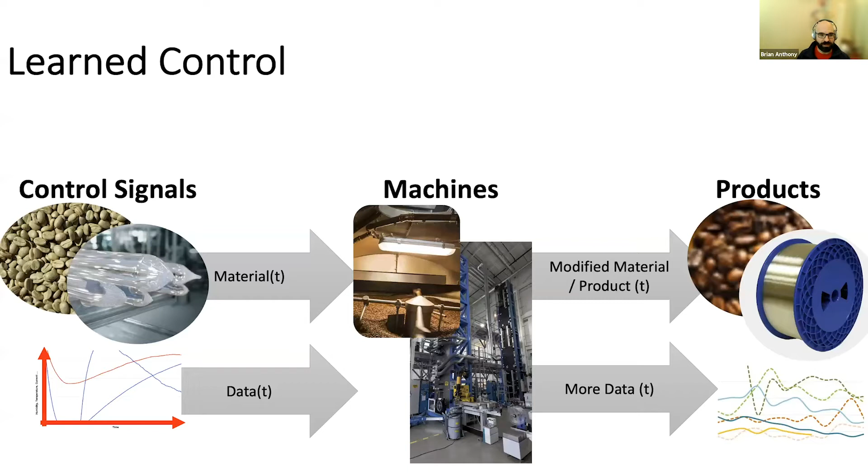The data going in is our control signals. The materials going in are raw materials, and that could be coffee beans or glass rods that go into machines. Those machines could be a draw tower for optical fiber or a coffee roaster. And the product that comes out is coffee or fiber, whether for apparel or optics.

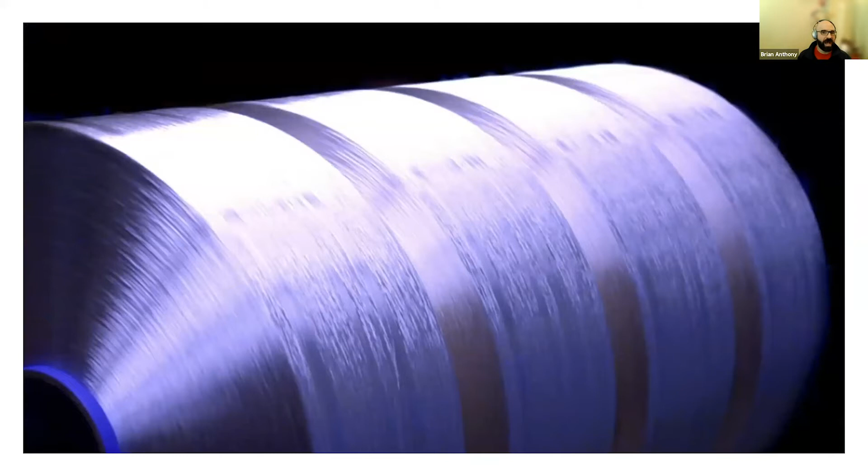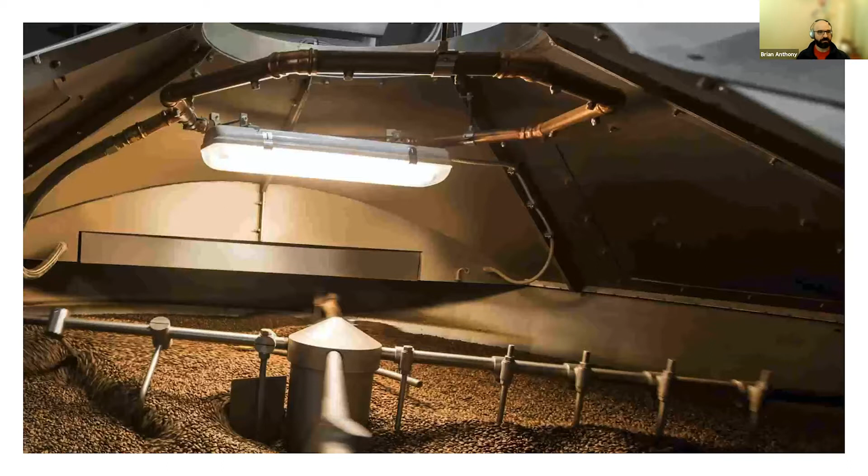So working backwards again from the product: here's coffee. You got to that coffee through some coffee beans. Here's some fiber, and you got to that fiber through extrusion phenomena of a material with certain cross-sectional properties. Those materials ran through machines—this one a coffee roasting machine, this one a fiber extrusion machine.

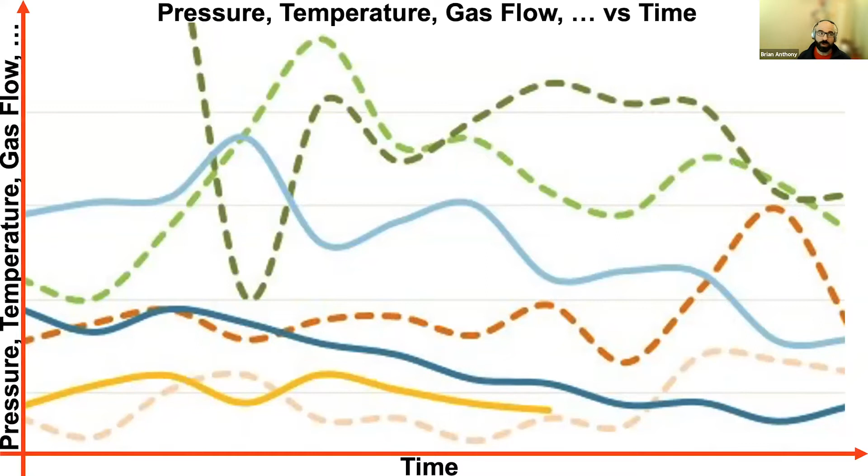Those machines are complex and controlled by signals over time—pressures or temperatures, gas flows or velocities, and forces. So that's a little of the context.

Now, when we're manufacturing, we're trying to make a product—trying to design and execute quality production of something that will be in the customer's hands. So you have some process making your fiber or coffee, and a controller that's measuring an aspect of it, like the diameter of the fiber or the temperature of the coffee, and wants to control it.

In the case of the fiber, I want to control the temperature used to melt the preform, I want to control the tension of the fiber, and I want to control the diameter of the thing I'm making.

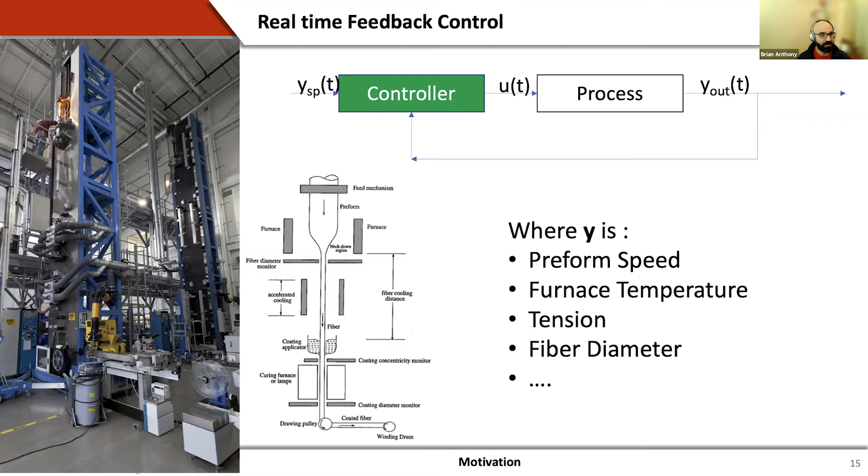By and large, if you survey most controllers and programmable logic controllers, the way machines are controlled in practice now, they use PID—proportional integral derivative—controllers that work well and are mathematically rigorous and understandable for linear time-invariant systems.

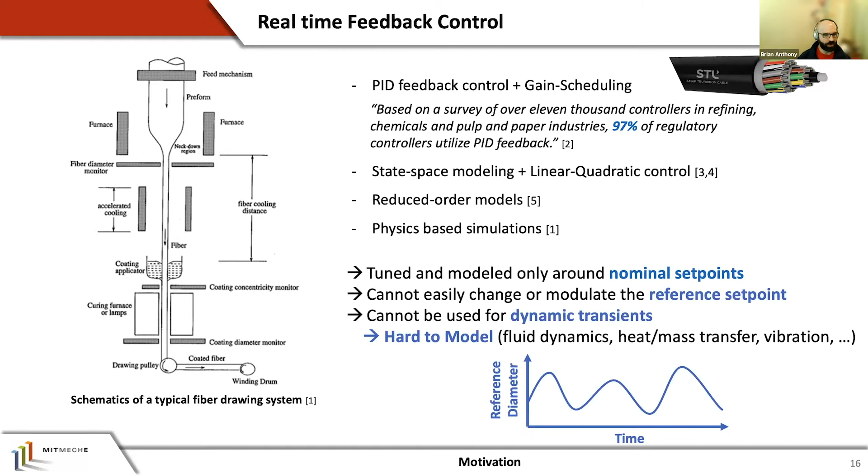There are innovations that take us beyond linear time-invariant systems, incorporating models of the process you may want to control. But something like a PID controller, for a system such as coffee roasting, fiber draw, or 3D printing, works less well where you want your process to be far more dynamic.

And you want your process to be dynamic if your product is dynamic—changing over time in its optical or dimensional properties. Controllers like PID work really well when modeled and tuned around a nominal set point, but it's hard to change them for new set points or operating conditions, and hard to completely capture the nonlinear dynamics for systems involving fluid dynamics, heat, and mass transfer.

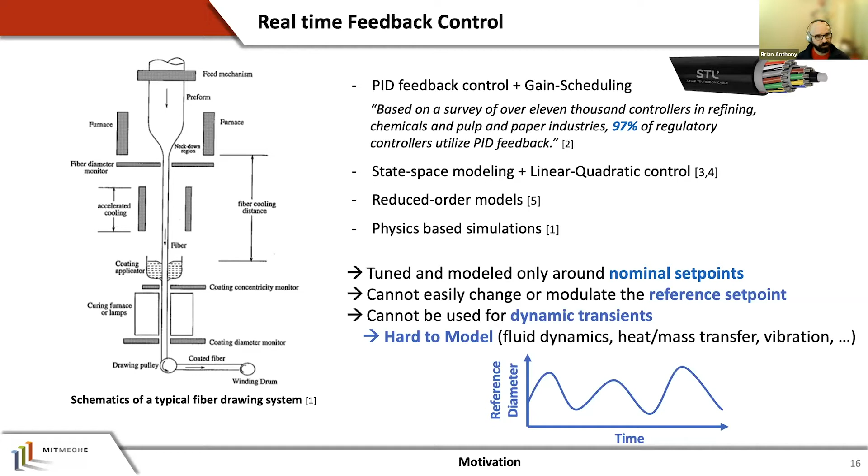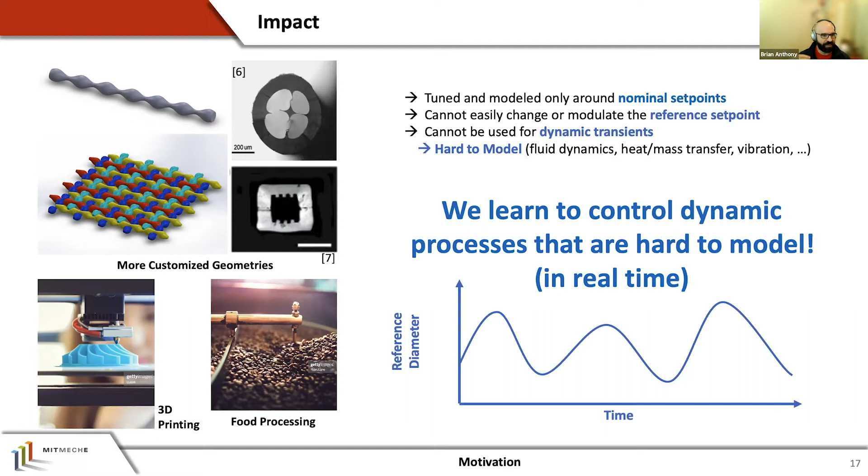So the question that we've been tackling with many, about 5 now, industry partners, is: let's figure out how we can integrate machine learning into real-time control, where we want to have the performance that a conventional controller would give, proportional integral derivative control, making sure your error is small and you apply control effort when your error goes large, to maintain within spec. But how do we take that process of operating around a set point to learn about the process we're controlling, to learn about the material flowing through, not learning from first principles, but informed by first principles. So let's look at how we improve controls where we're looking at things that are hard to model from first principles, but learn a lot more while we're doing the thing we want to be doing, just producing a high quality product.

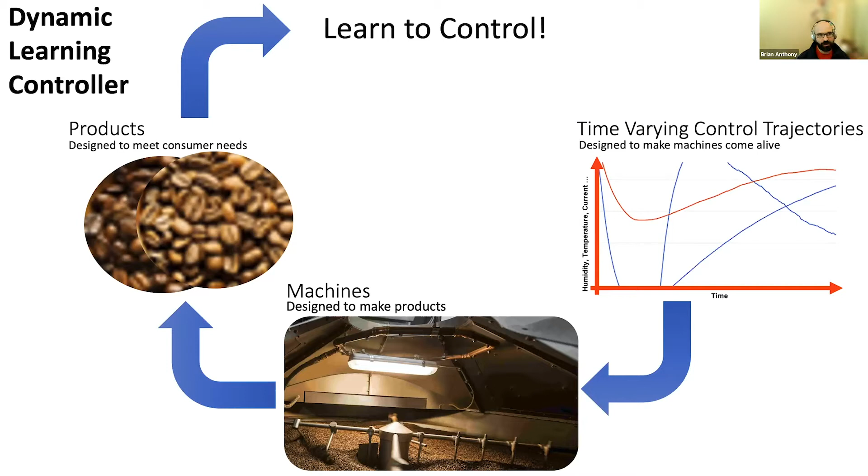So the framework, if you think about this, is in this era of big data, you're getting lots of data in a manufacturing context all the time when you're doing control. We have control trajectory signals that we're using to control the extrusion rate, the winding rate, the heating rate of fiber, or the pressure and temperature of coffee beans being roasted. It goes into the machine, interacts with the product. And when we learn to control, we want to learn the physics, learn to optimize, and learn to make new variants of the product we're making.

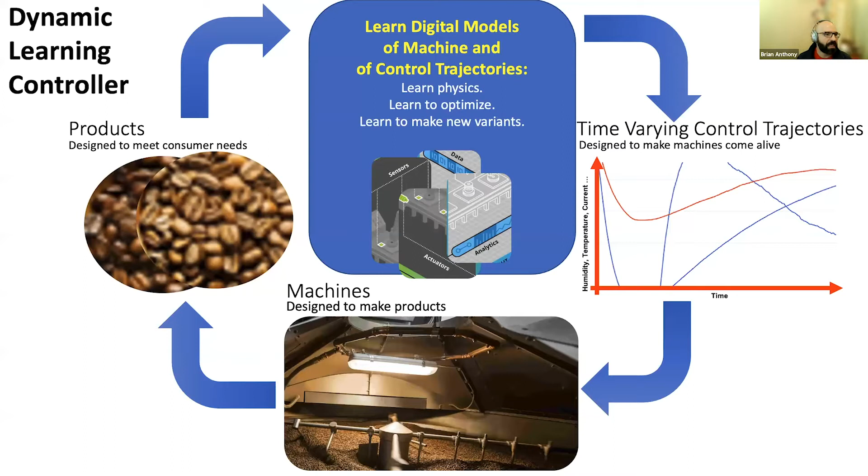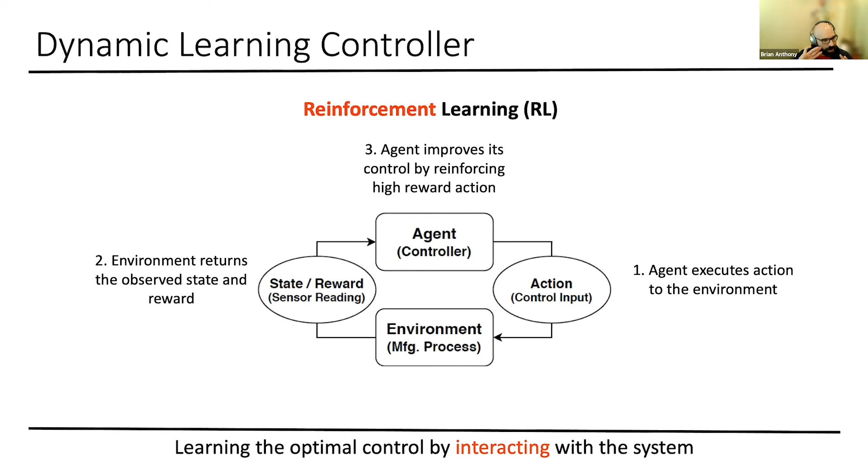In the language of deep reinforcement learning, this figure looks a bit like this: we have some type of action, something interacting with the world, our controller. We have some environment we're interacting with, in this case the manufacturing process. We have some type of reward, the control signal we're trying to minimize. And there's potentially the ability to add this agent, a higher level layer of logic that allows us to improve over time, not just say we have fixed gains, our fixed way of operating, but let's learn online, not offline, not collecting data and sitting in front of your computer connected to Amazon Cloud doing it at your leisure, but doing real-time learning while you're real-time controlling.

So if we break that figure down into this architecture of deep reinforcement learning, we have all these little pieces you may have heard about in the machine learning literature. We have some actor or agent, we have the machine. There are measurements being made, the diameter, how fast the fiber is being pulled, how much heat is put in. We measure the diameter, and we want to minimize the error between the diameter being produced and the diameter we want. And then there's all this other stuff wrapped around it, which is the machine learning aspect. Let's go piece by piece.

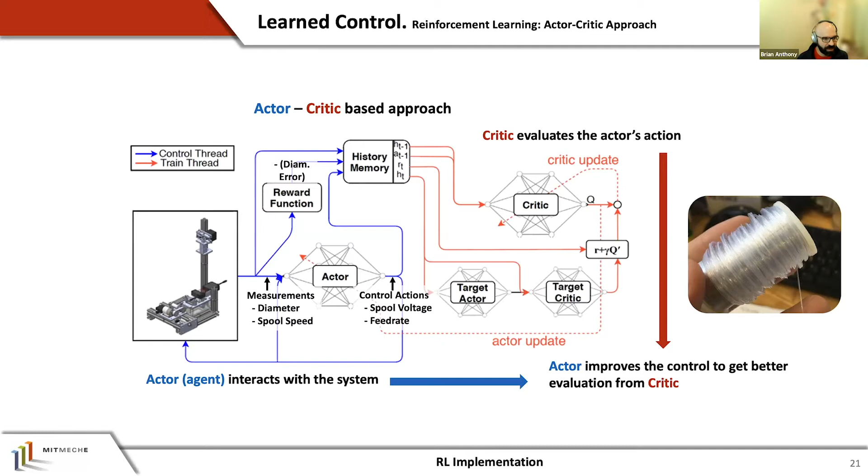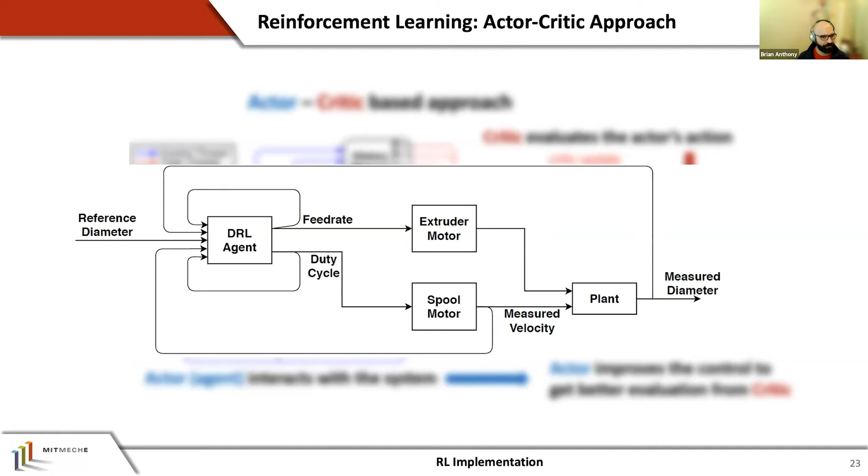This aspect of the reinforcement learning flow diagram, the blue box, if we drill into that, is really not a lot more than a conventional controller. We have some reference we want to control for, the diameter. That goes into a machine, into a controller deciding how to apply control effort to our machine, in this case the motors for extrusion, the motor for spooling, and we measure something coming out of the machine, in this case the fiber. We put it back around and we have this controller. So this deep reinforcement learning agent, in this little aspect, looks a lot like a conventional controller. That's what allows us to do real-time control for that machine.

And then these other pieces are wrapped around it, the machine learning aspect, the ability to learn and observe over time. So we have that controller controlling the machine, but we're storing a history of all the data we've been receiving, both measurements on the machine and measurements on the materials in and out. We have some additional reward, an objective function, and we're still trying to minimize the error between what we want and what we get. So that is roughly what the reward functions will look like.

And then we have some additional logic, which can look like a neural net with multiple layers, multiple nodes, which is really just a complex way of fitting data to models, learning the models that explain the data, but then helping to inform and guide how our PID gains, or the gains of a slightly evolved controller, may need to be modified to get even better performance.

So, to try to demystify this a little bit, in manufacturing and design we've been doing aspects of machine learning for a long time. Feedback control is machine learning. Statistical process control is machine learning. But now with the advent of additional compute and additional sensors, efficient compute, we can add a lot more compute to happen in real time and learn more about the system as we're controlling it.

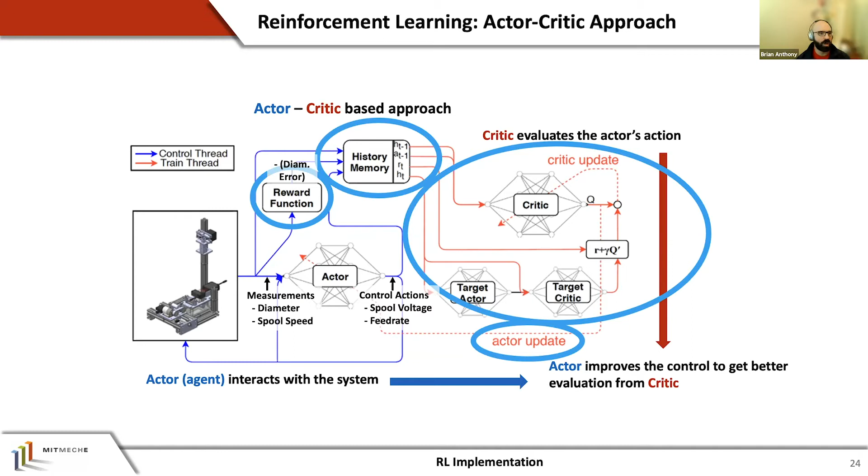A paper led by Sangwoon Kim recently came out that talks about this very notion in the application of controlling fiber. We started with a lab-based system to make a polymer fiber, and we're now collaborating with an optical fiber manufacturer to deploy our learnings onto real draw towers.

We're in the process now of applying these same learnings to other processes with additional industry partners, in particular looking at coffee roasting.

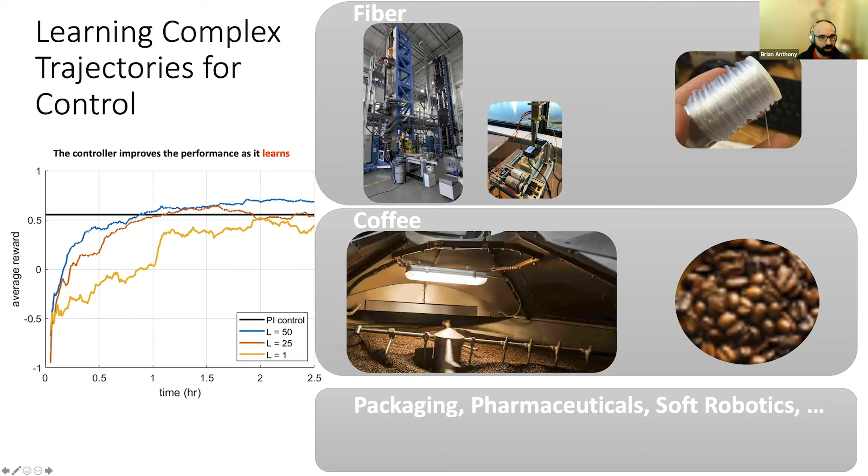Now, I didn't say too much about the fiber draw process, and I had to explain a little bit more to share why this figure is so interesting. If you think about optical fiber draw or extrusion in general, it's a mass flow problem. You're pulling mass out of a heater that's melted the material, and you're pushing mass in. There's some complex physics happening in terms of the heat and mass transfer, and the neck down of the nozzle that goes from a large area to a smaller area to produce the diameter of the fiber that you want.

One of the exciting things about this plot, if you look at it for a moment, is: if I have a fiber that's being extruded and I want to make it go smaller, I just pull faster, or I could push slower. One of the intuition-reinforcing things we see that this controller, that the system allowed us to do, is to simultaneously figure out this sort of simultaneous pushing and pulling that appropriately rapidly deals with the transients if we're trying to change the diameter of a fiber over time. We'll sometimes pull faster and sometimes push slower to accomplish the same target change in the diameter of the fiber we're trying to produce.

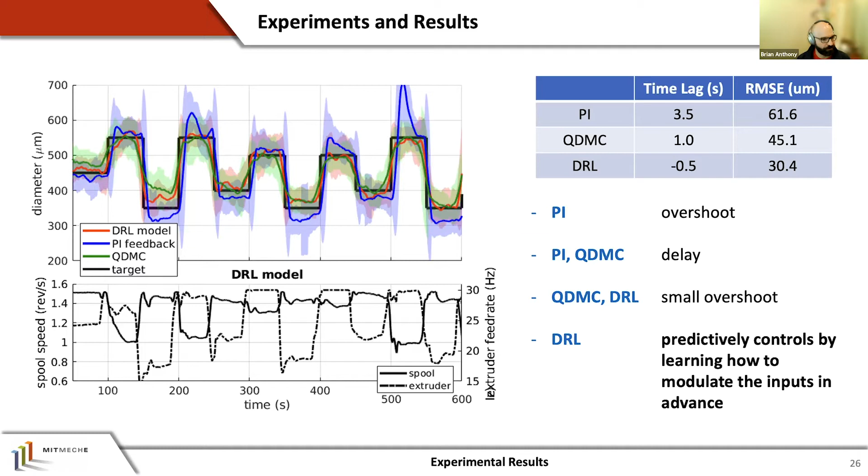So this strategy is something we're now very excited by and are repeating in a number of different processes. It's a strategy that doesn't require a completely developed first principles model. It can be seeded by first principles, but it learns over time to deal with some of the difficult and hard-to-model physics embedded in the process we're controlling. It's using this notion of deep reinforcement learning, but in real time, to really, over time, make your system better, higher quality, and deal with transients in a better way.

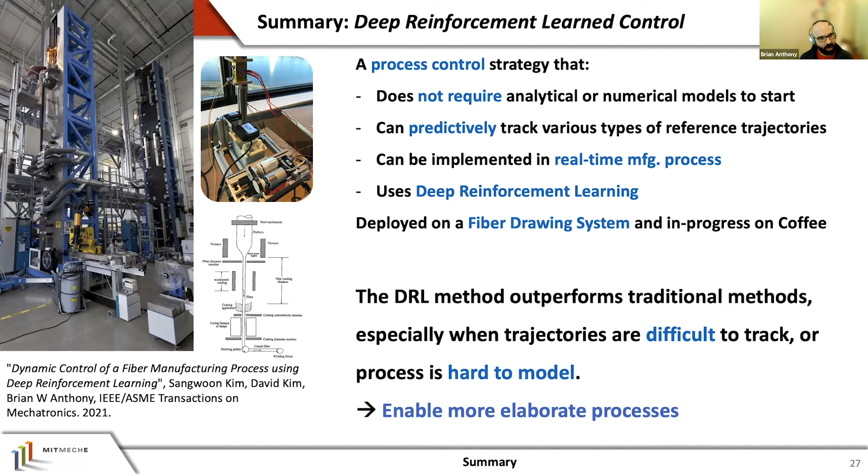Now, one of the things we've really interestingly run into, as you can imagine, is that there's a lot of installed controllers in the world, whether for optical fibers, coffee, painting, or assembly. How do you approach this wonderful new opportunity of machine learning in real time on existing systems? Where do you even get started? I want to share a little bit about that, and would love to talk with many of you about how to amplify that in your facility or in your research.

If you think about a system in some sense, it's a bunch of blocks. We're taught to draw it as blocks in a block diagram that are connected with arrows and feedback loops.

Here's a rough drawing of the control loop for a fiber draw system, where we have this black box, which includes the furnace and how the material travels, the capstan that's wrapping it up. And then there's some controllers, these red boxes — one controlling the tension of the fiber, another controlling the feed rate of the material going in, and another controlling the feed rate of the material coming out.

So the way we approach decomposing an existing system is that typically we'll have data at the inputs and outputs of all of these boxes. So we know what the controller is, what the PLC is doing. It may be a proportional integral derivative controller, and we'll know what it's doing, but we can collect data at the input and output and look at a regression model to confirm that it really is a P, a PID, or a PI controller.

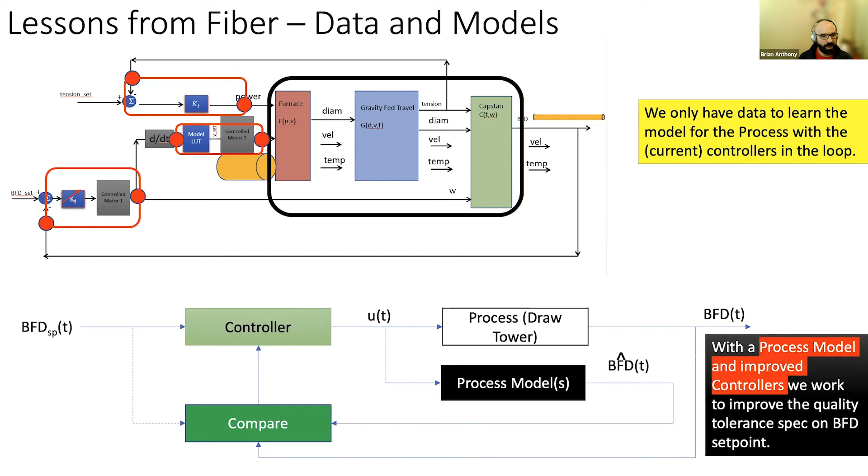Our approach to this is very much how do we go from data to deploying. We'll start with some intuition for the model of the process we're trying to control. That targets the type of data and the type of machine learning structures you may want to use to learn a little bit about it. But it's not just the blind application of a blind regression model.

Taking some of the physics — machines we know oscillate in a particular way, heat transfer happens in a particular way — so informing our machine learning with an intuition for the physics, and doing designed experiments to collect data as we normally would. In the manufacturing environment, if you have a lot of bad data, you're probably doing something wrong. So one of the other interesting challenges about machine learning in manufacturing is you have lots of really good examples and fewer bad examples. Having some physical intuition for what's going on dramatically helps accelerate your learning and application of innovations in the controller to improve quality.

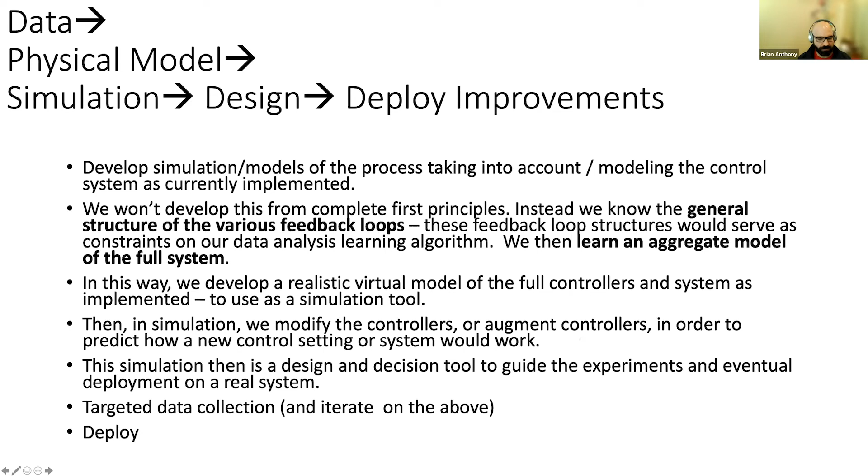So the generalized approach we're taking here is starting with existing controllers, collecting data before and after the process, collecting data before and after the controllers, using machine learning techniques to develop a process model. And with that process model, we're able to improve the controllers for better set point tracking and better recovery from transients.

So let me transition now for a moment. I want to tell you a few quick stories. That was all about real-time control.

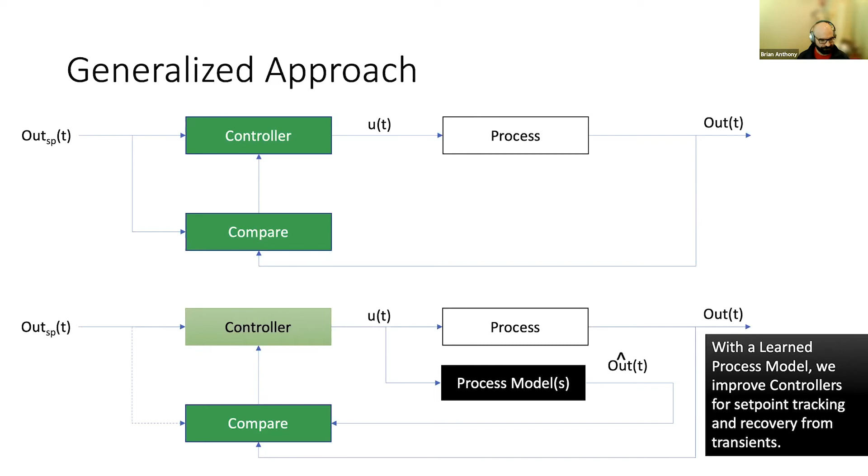Let's take a step back and say there's a lot of interest in industrial Internet of Things, or how we can collect data across our entire enterprise and use it to learn something — learn when machines are going to be down, or understand the efficiencies of different arrangements of people and resources.

So many individual companies are certainly excited by AI, machine learning, Industry 4.0, the industrial Internet of Things. An opportunity that I think maybe goes beyond that is breaking down the four walls of the factory, making our factory smarter, certainly by collecting data and figuring out how we can extract actionable information from that data inside our four walls. But what if we also...

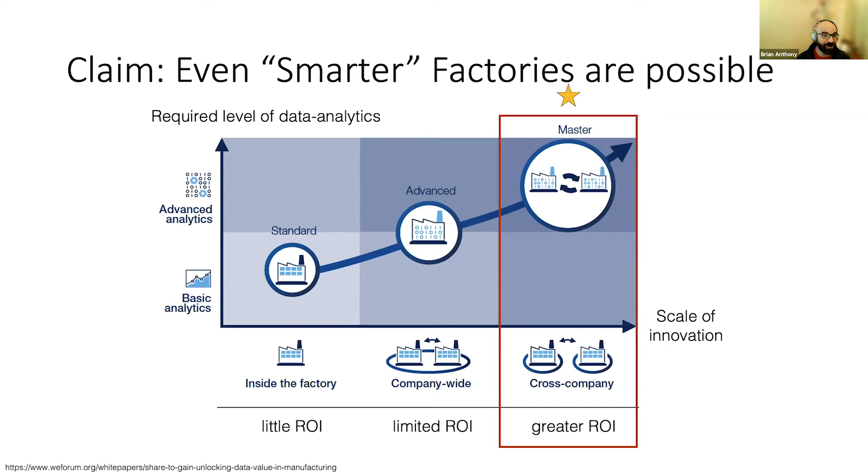Maybe somewhat analogous to learning population data from people for healthcare and wellness applications, what if we share our data, maybe across companies, across collaborators — can we get even more valuable information? And can we develop the business model around which allows us to share data in a safe way? So there's an evolving understanding, a belief that data sharing — beyond just collecting data and using it in your four walls, but allowing us to share data along the value chain, along the supply chain, both with your customers and potentially with your competitors — there's dramatic financial opportunity.

But you should be, my suspicion, a little suspect by that. I'm not going to share my data. Why would I want to share my data? It's my data, it's my proprietary data, it's my secret sauce.

Fair enough, right? But the argument is, and I believe this in many scenarios, if there's some willingness to share, there's additional value, additional benefit. And if we can lock down the pieces of information that are your secret sauce, and allow things that aren't your secret sauce, that are maybe more about the maintenance of a machine, or a general process used by many manufacturers, to be shared.

So how do we connect, and why do we want to connect our data with others?

David Kim is a doctoral student in mechanical engineering who is really looking at this area of manufacturing and data sharing, privacy, and learning. And the concept, if I didn't make it clear, is highlighted here.

It's quite simple. If I'm one manufacturer, I may have a little bit of data about a machine or a particular mode of failure, and I would like to use all of my labeled data, good and bad, to figure out what is a decision boundary, a classifier that allows me, with a new observation, to know whether something is good or bad.

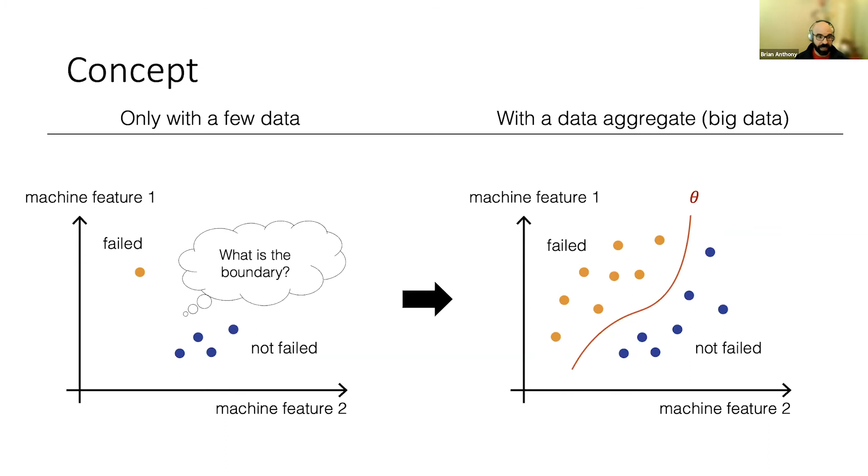Quite typically, if I'm a good manufacturer, I'm going to have lots of really good examples and very few failed examples. So it's going to take me a long time to figure out on my own where this decision boundary may be. But maybe I can aggregate data, maybe collect a lot of my own data, or collect data across multiple sites, or for even bigger data, collect it in conjunction with my collaborators and partners.

So if we do that, if we have multiple data sources all coming in, that gives us more data. It gives us a better ability to make this boundary. Now the question is, how do I do this in a shared way, in a secure way?

This is an area where we'd really like to collaborate with you, both on the technology for machine learning, but also the business models for how we may be willingly sharing data.

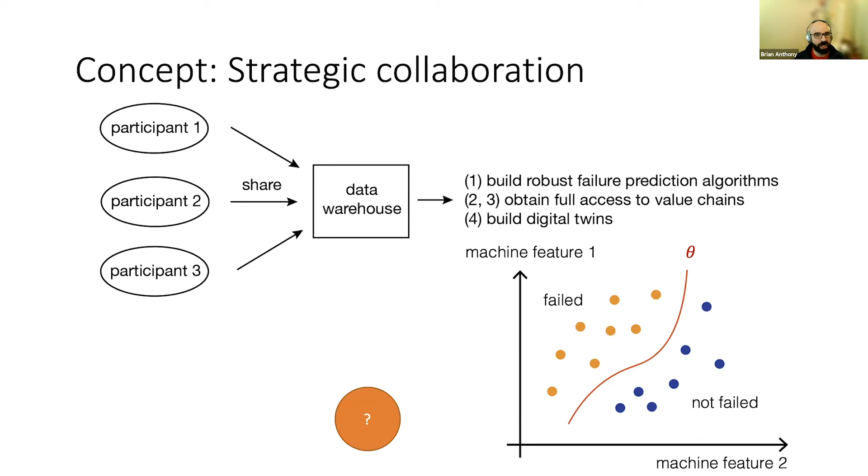The way that we technologically enable this is through some encryption techniques called homomorphic encryption, where we can make sure that your data, when it's shared, is always protected. But not just protected—when we do the machine learning, it's happening in the encrypted space. So we don't decrypt the data to do our learning; we actually use encrypted data and process on the encrypted data.

The techniques that David is developing allow us to implement what you'd think of as classic or more modern machine learning techniques, whether classification or regression using support vector machines or decision trees, but doing that on data that's been encrypted.

We believe that this framework is going to allow us to really explore the idea of sharing data across multiple factories, across multiple companies, in a way that is both technologically secure and has some really interesting business models associated with it. Well, if a data breach were to happen, maybe there is an insurance model that an insurance provider can provide to backstop that, but with a known and quantifiable risk portfolio because of the security key that you're able to put on the homomorphic encryption, for example.

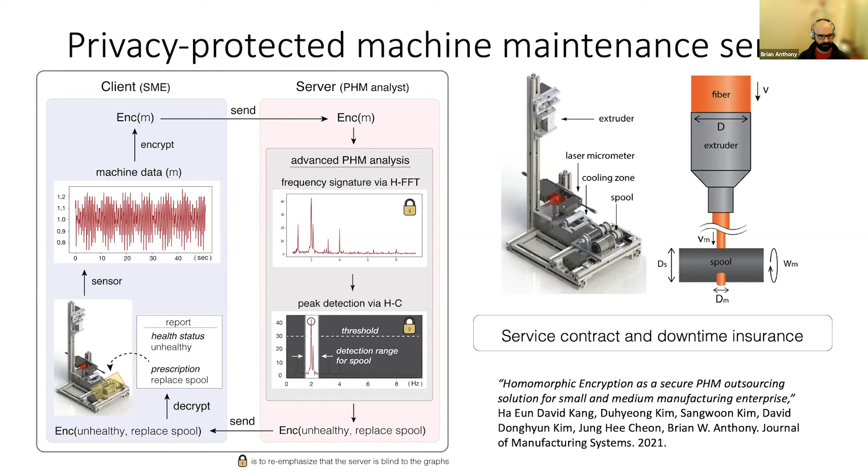Okay, so the last story that I want to tell you—and then I'll try to put this together into some opportunities for collaboration and some lessons learned.

Video-based machine control. If you go into a factory, it's not uncommon to find a camera taking images of something coming down the conveyor belt—a circuit board, a car door, or the height of fill of a bottle—and making decisions about the way that part or product looks. Is the fill high enough? Is the cap on straight? Is the circuit board or its components oriented in the correct way?

And then when the complete jam happens, if you had to unjam your office printer, you know that can take an hour. If you're unjamming a factory scale printer, it's hundreds of thousands of dollars and lots of hours.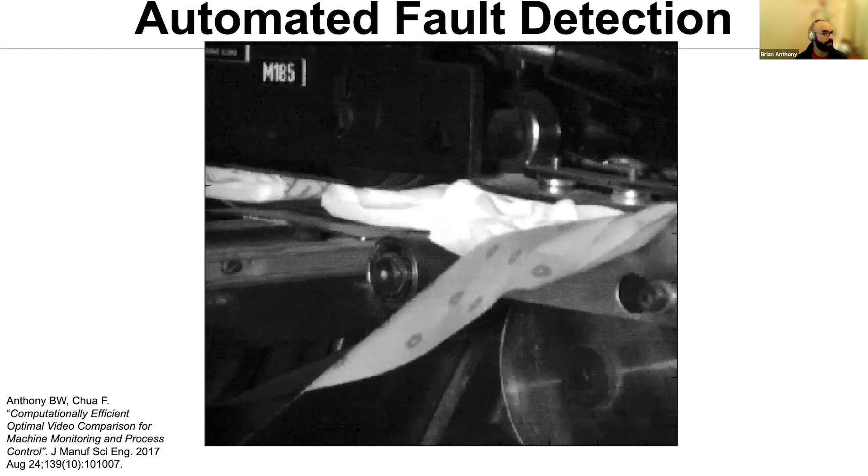So what you'd like to do is observe how this thing is flowing, how this thing looks, the material looks over time. In this case, happens to be a diaper being packaged, and to use information extracted from the video to stop the machine, adjust the flow rate of the machine, or do something.

Now, this is very applicable in scenarios where you don't have a good sensor that would be able to detect vibration or other signatures. This is something that is an amorphous, flexible, flowing piece of fabric or paper.

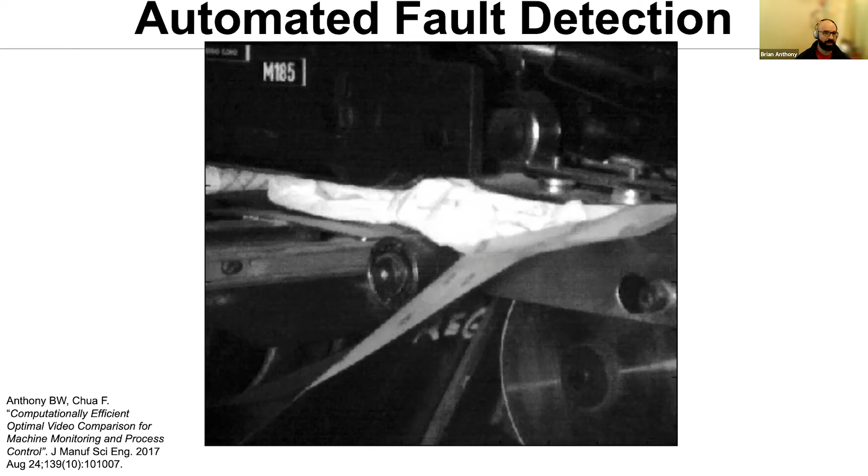Now, how do I go from this video to being able to control the machine? How do I go and produce something like this, which is a control loop, where now my sensor is a camera acquiring some video. I have my set point, which is the video of the way that I want the system to look. And I need to compare those in real time.

So without a doubt, you can go to the machine learning cookbook of approaches and see that many of them aren't really great at real time. And many of them need lots and lots of big data, lots of examples.

So not only do we want to figure out how to compare video clips to control our machinery, but we may want to guide our comparison. The data that we may have as an example could be as small as one example.

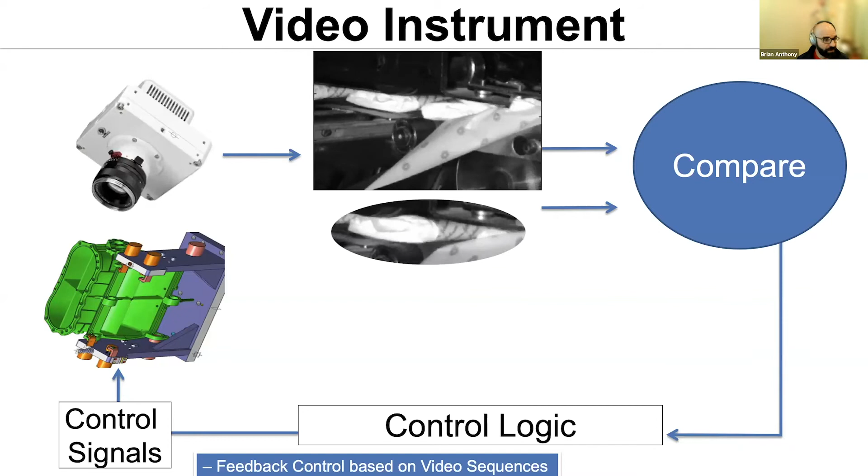So how do we approach this problem? If I want to control a machine based on the way it looks over time, or the way the material is flowing over time, the approach that Fitriani took in her work is really this concept of what we'll call the video alignment path. If you think of a video as a cube of data, 2 spatial dimensions and 1 temporal dimension, it's a volume of data.

And I may have an example of the way that I want this volume, this thing, to look over time. My example, my control, my set point. Here's this trajectory of appearance over time. And then I have new incoming video streams.

We've developed an algorithm and an approach that says, well, actually, we can dramatically reduce all this data complexity. These are gigabytes of data per second coming at us in this high-speed streaming video. But we can simplify the problem by saying, let's ask the question, if our video were a Slinky, if you're old enough to remember what a Slinky was, and had your Slinky go down more than 1 stair at a time.

But if you think of your video as a Slinky, a sort of a long, stretchable spring that can be stretched locally and compressed, it can be distorted up and down. How do I take my video, one video, and stretch it, warp it, to make it follow the trajectory and path of another?

Fitriani developed a number of both hardware techniques, hardware accelerators, or software techniques to do this very thing. So to take two videos in, compare them by asking the question, how do you stretch one video to look like the other?

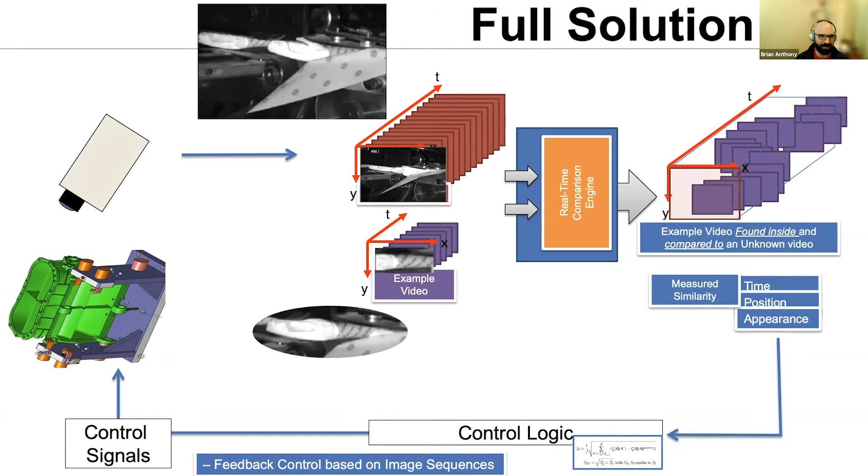And this builds on top of the GPUs that you will use in gaming, a highly parallelized algorithm that takes as input a sensor that is a camera.

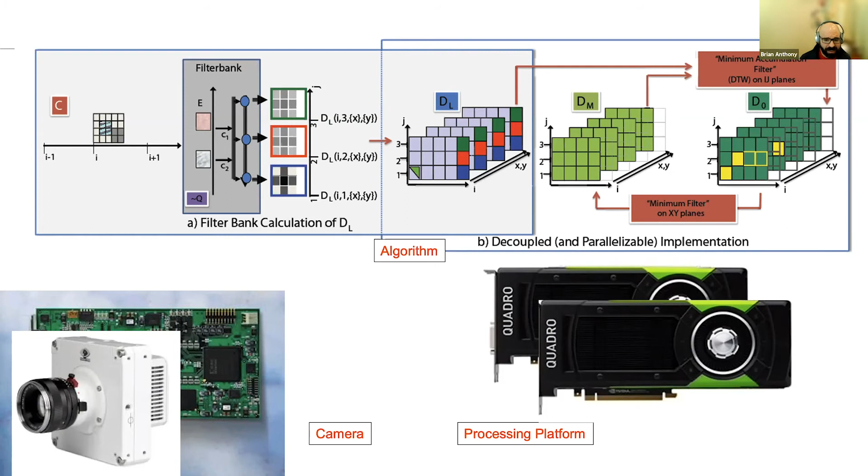But in the end, all that machinery, if you will, goes to produce these run charts that you see all the time in the practice of manufacturing, of process control, of statistical process control. So in this diaper example, I'll go to this next slide here.

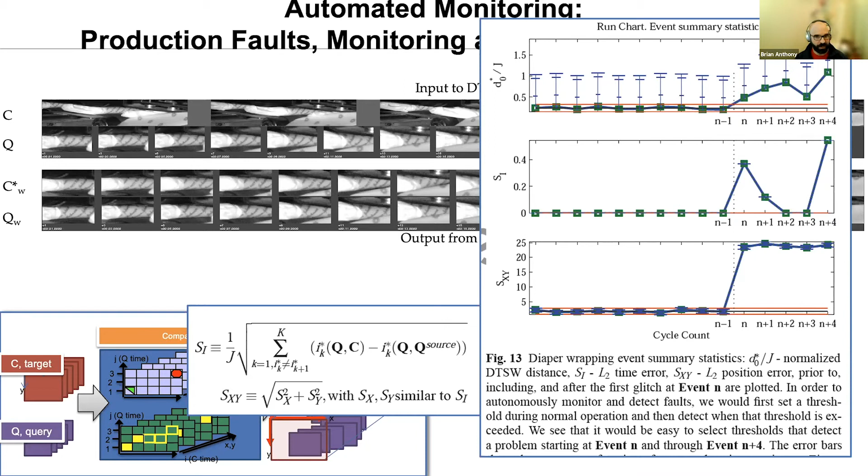In this diaper example, this is a run chart where the diaper is being produced very well. There's not a lot of error or deviation in the spatial-temporal trajectory of this path. At cycle N, the first cycle where there's a little bit of a bobble, there is a measurable change in the trajectory of how these two videos are aligned.

And so that allows us to flag when something has happened. By the time several cycles later, when complete jam happens, there's dramatic deviation in the spatial and temporal similarities. In this way, we've, in a very fast and computationally efficient way, gone from videos, these big cubes of data, aligning them in time and space, to extract a trajectory that gets us to a number that says what is that overall similarity.

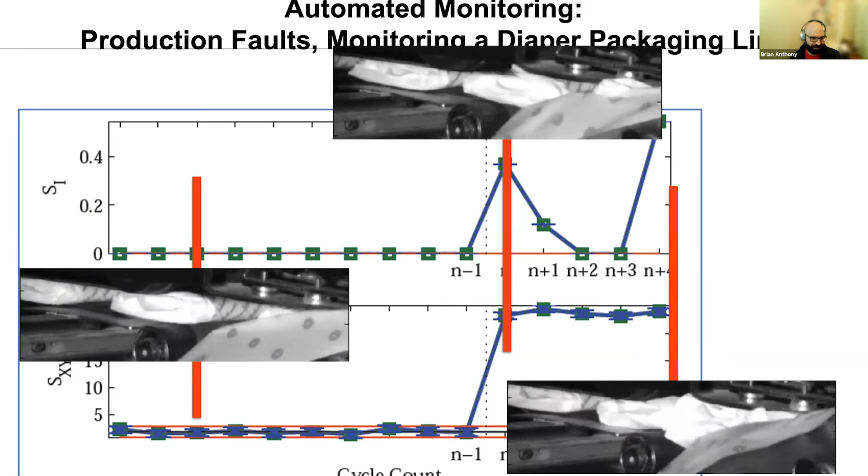Okay, so I hope I've excited you. I hope I've alluded that at this intersection between mechanical engineering and the application of instrumentation and sensors and machine learning, there's a huge opportunity. Broadly, yes, we're all engineers, we collect data, but in the area of design and manufacturing, I think it's probably even bigger. I'm biased, but it's plenty large in that space by itself.

So the other thing I want to share with you, and I'll be bringing in Dave and Jose here in a moment, through the MechE Alliance, through mechanical engineering at MIT, we've been reaching out to industry and with our students and alumni to establish better relationships, better community.

During COVID, we had a few experiments. We initiated this seminar series that you're spending your time on today, so thank you. We also had, before COVID started, and still will have, industry immersion projects, which are summer internship opportunities for graduate students, where we've co-designed the activity with industry and MIT faculty. And more recently, over the last semesters, we had a flavor of UROPs, undergraduate research opportunity projects, or ELOs, experiential learning opportunities.

And we've learned some things. We've learned in our collaborations with industry there's a lot of interest in this activity and intersection between the physical and the data sciences. There's appetite and an opportunity for engaging with companies in ways that are different than a multi-year research project. We need to start working together on something bigger than a class project, smaller than a multi-year research project, and there's an appetite and a need to develop those more targeted, more timely collaboration opportunities.

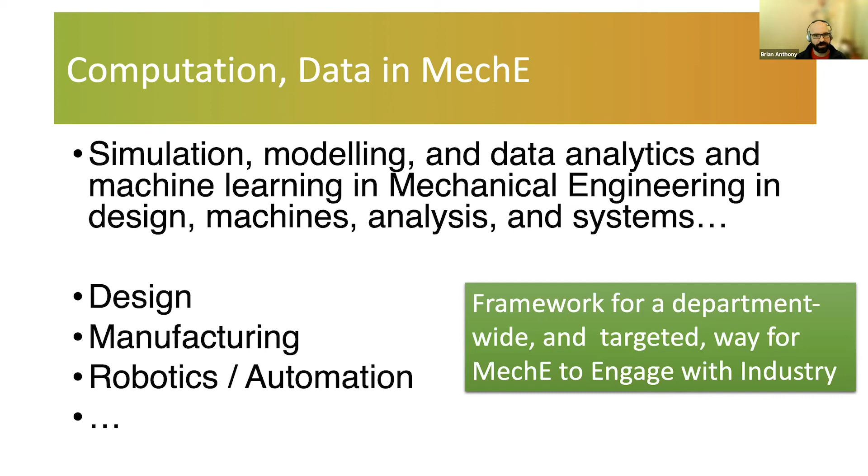So we've been doing some internal questioning. In general, and in the area of data and compute, how do we as researchers collaborate? How do we want to collaborate? How can we better engage with industry and our alumni in education, in our research, and our service? And what should we do as a department, as a faculty, for our investigators and for our students? In asking those questions, we've come up with some themes.

It's very helpful to have mechanisms to enable small project opportunities with industry collaborators, having a vehicle that allows us to do something that can sometimes fit in a class, but a class can be extremely constraining, and something a little bit smaller than what you would do potentially with a 2 to 5 year research project. This also seems to be an opportunity to expand professional degree offerings, master's programs targeted in a particular field. We have one of those already in the department, the Master of Engineering in Advanced Manufacturing and Design. And certainly looking at continued education.

So what we've decided to do as a department, to further inform this idea of how do we get some small projects going, that could be anything from UROP projects to master's level projects, but are not at a multi-year research project just yet, is to pilot an experiment bringing to bear machine learning and data science in the context of a degree program we already have. As I mentioned, we have the Master of Engineering in Advanced Manufacturing and Design degree program, a one-year professional degree, and Jose and Dave will share a little bit more about that.

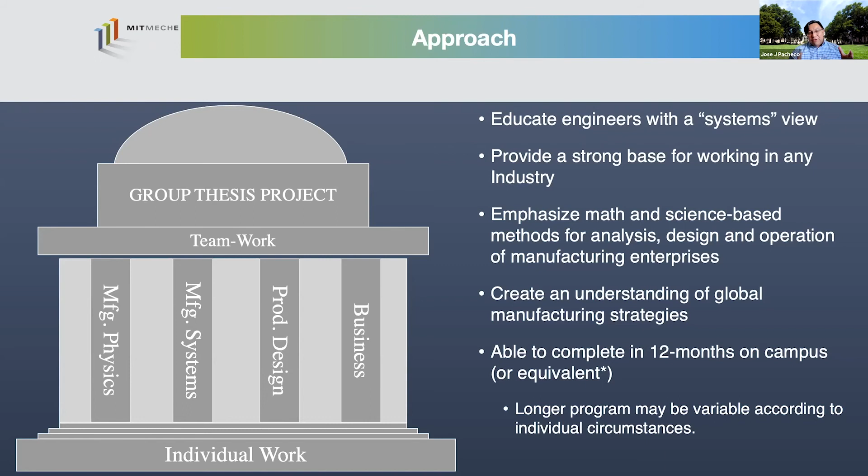And so taking that further, we then have these thesis projects that are done in groups inside a real world company. These groups consist of 3 students, and they're usually—I say 3 students, there are some exceptions to that, and we'll talk about that a little bit later, perhaps in the Q&A. And the projects are, for the most part, full-time during the summer, during the last summer of their 12 months. They start in September, they go through the following September.

And so they're working full-time at these companies from the middle of May to the middle of August. But they start working with the company earlier in the year, usually around February, and start meeting them once a week. And what's important here is that these are not just internships where they go in and then come back right out.

They're actually working directly and very closely with a company supervisor and an MIT faculty advisor that has expertise in whatever the theme is of that project, whether it be design, production, or supply chain. And because it's an educational project, and because of some of the intellectual property rules around that, in order to have companies participate fully and openly, the companies underwrite the full cost of the project.